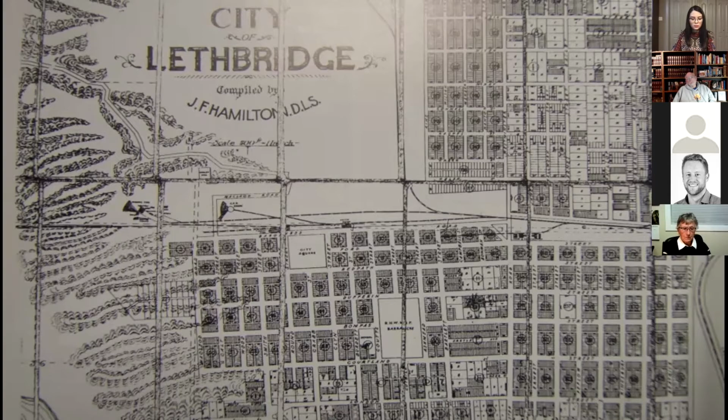A little planning background: in the 1950s, through recognition of the importance of downtown, specifically around balancing city development, the city made a pretty critical decision to expand to the west side. A lot of the consideration was that there was land to be developed, but it would also center the downtown centrally in the city.

In the 1960s, there was a general plan done by the city's planning department, which talked a lot about strengthening downtown, avoiding urban sprawl, preserving Galt Gardens, reducing and eliminating incompatible uses, and establishing a downtown merchant group, which is reflected today in the downtown BRZ.

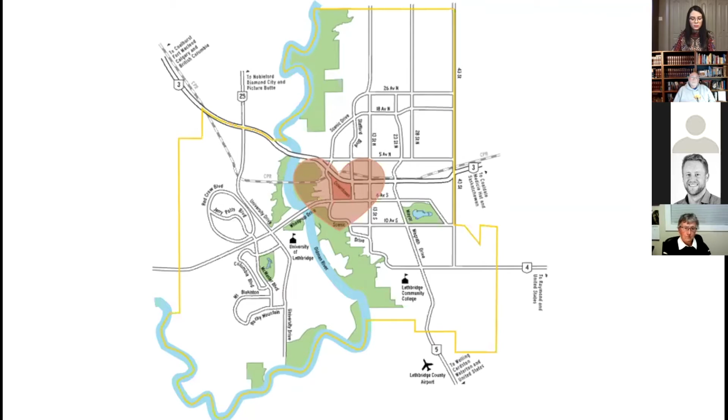Through the 1970s, a number of development schemes saw the creation of Lethbridge Center in 1975, the Provincial Building in 1976, and Lethbridge Lodge in 1978. In the 1980s, we saw the courthouse being built and the railway relocation at the center site, which saw the railway lands redeveloped into what is now Park Place Mall. In the 1990s, we saw a number of seniors housing facilities built, the AMA, the Lethbridge Police Service building, Chapters, and Toys R Us.

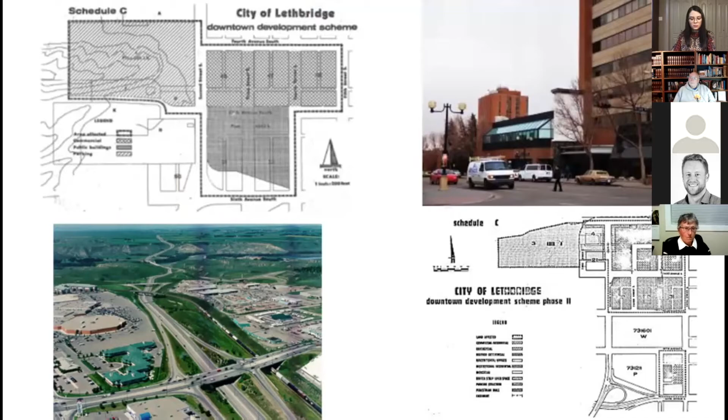Unfortunately, in the late 1990s and early 2000s, despite positive developments taking place, there were still a number of problem locations, including some derelict and deteriorating properties around downtown. Public intoxication and loitering were becoming pressing issues for downtown, and there was extra pressure to do something about it, which led to the development of some pretty strategic initiatives.

Those improvements didn't take place just by chance. In 2007, City Council established the need to look at and prioritize downtown, and by doing so, they began the project of the Heart of Our City Master Plan, which began in 2007.

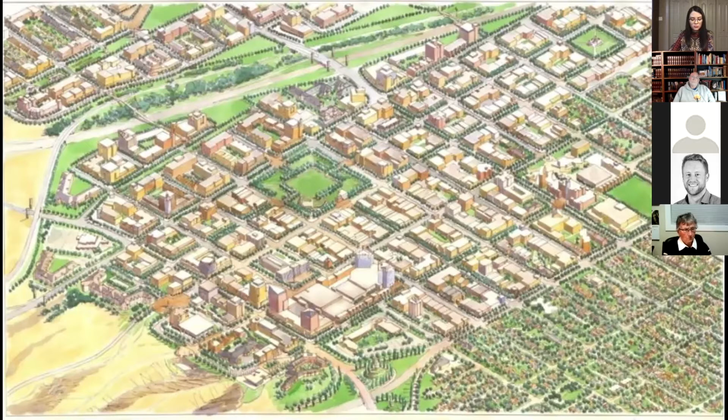By the completion of that master plan, they had established the plan itself, which gave the direction, the Heart of Our City Committee, and the position of Downtown Revitalization Manager. The purpose of those three key pieces was to generate a viable vision for the downtown that reflected the community's values, to prepare effective strategies and tools for implementation, and short, medium, and long term actions to actually enable revitalization to take place.

So the Heart of Our City Committee is the committee of City Council tasked with championing downtown revitalization. Their mandate is to be a champion, provide strategic leadership, and develop incentives, programs, and initiatives that promote vibrancy throughout the downtown. A key member of that committee is the Lethbridge Historical Society.

From 2007, the focus was really on the downtown. It put a lot of priority there because there was a lot of things that had to be achieved, and we've done a lot of work in that area over the last decade or so. In this map, from the Heart of Our City master plan, the downtown core itself is reflected by the Scenic District, Park Place District, Central District, and the Midtown District.

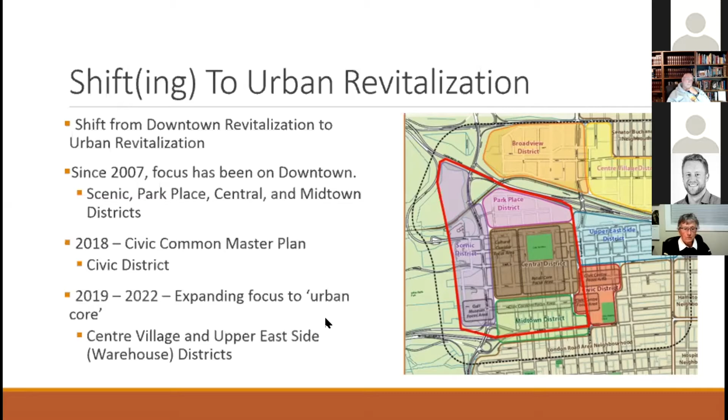In terms of urban revitalization, a lot of the work I do is grounded in five pillars: leadership and strategy, planning, design, and infrastructure, economic development, public space management and operations, and marketing communications. I'm just going to go really quickly through these.

Leadership and strategy is all about inspiring trust, inclusivity, and vision in the community, because revitalization is embedded in change, and change is very scary to the public. Even if you think you want change, when change starts to occur, there's a tendency to push back from it.

Planning, design, and infrastructure is really the emphasis for good planning and design of the built environment, which includes both the private and public realm, and context-specific built environment strategies that respond to a number of place-based identifiers in terms of responding to things like quality of life, built environment, culture, climate, community vision, etc.

We do a lot in terms of planning and working closely with our planning and development department. As George had mentioned earlier, that was where my position formerly was, and now it's in the city manager's office, but it still continues strong ties to the planning side.

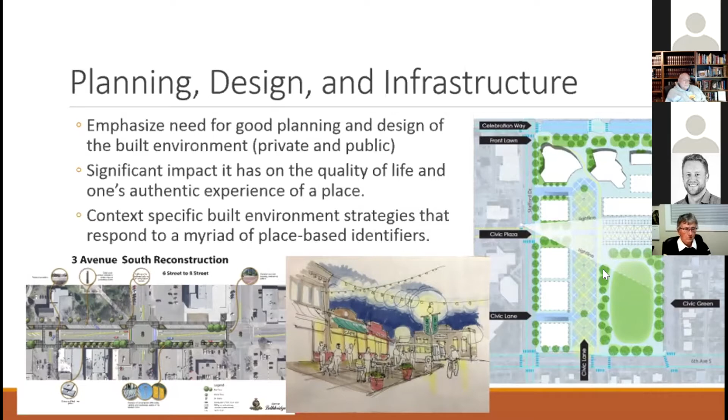From an economic development perspective, we foster a diverse and prosperous economy in the urban core through the development of programs, incentives, and initiatives, a lot of which are based around providing financial assistance or stimulus to provoke and encourage growth and development in the core and increasing that tax base.

We have a number of programs currently, through the activity grant, adaptive reuse incentive program, which will probably be something you can draw some correlations to with Elizabeth Songer's presentation in the next session, the housing incentive program, our targeted redevelopment program, and our Main Street facade and signage program, all of which you can find on the city's website under lethbridge.ca/downtown incentives. City Council will actually be looking at a few amendments to those next Monday.

So the second to last pillar is placemaking and public space management. This is all about cultivating a safe and vibrant environment, managing the public space from cleaning, beautification, wayfinding, landscaping, and of course our favorite thing, parking. The big thing here is about addressing and providing direction to the actual and perceived safety and security issues.

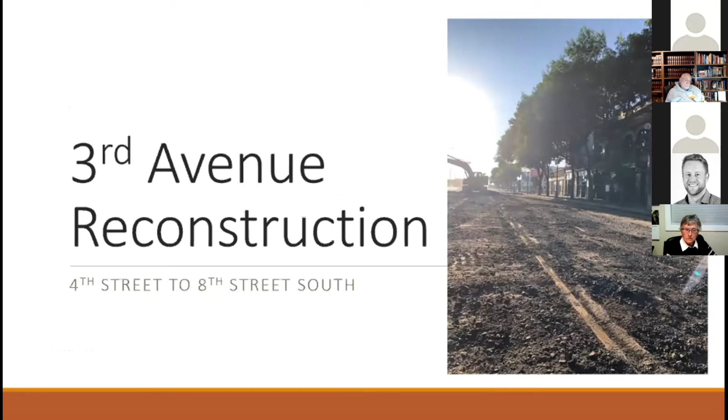So with that, I'm going to move to the second part of my presentation, which is specifically on the 3rd Avenue Reconstruction Project. Hopefully this part will tie in some of that background information around why we're doing revitalization and the processes that we go through.

Some might say 3rd Avenue South is memory lane for downtown. It's one of the city's very first streets. There are over 10 historically significant and 4 designated properties just between 4th Street and 8th Street, which is the focus of the project. It's the location of hundreds of community events, celebrations, marches, and protests, from Whoop-Up Days to street wheelers to protest marches, Remembrance Day, all sorts of things that I think Belinda would probably be best to tell you about.

It was home to the Main Street car line from 1912 to 1949, at which time, when it became too expensive, it was replaced with bus service. It was also the main highway through Lethbridge for many more years, approximately 1940 to 1980.

I've included a YouTube link here that many of you may be familiar with, to Belinda Crowson's presentation on the streetcar. If I can share these slides with the Historical Society, I encourage you to check that out.

In terms of the reconstruction project, the vision was to completely reconstruct 3rd Avenue between 4th and 8th Street to create a more vibrant street that offered a safe, lively, accessible, and attractive place to work, live, shop, learn, and play. This project was not only to provide important utility and infrastructure upgrades to the street and surrounding buildings and businesses, but also to redistribute the road right-of-way for a more balanced approach to active modes such as pedestrians and cyclists, and to enhance the aesthetics of 3rd Avenue with some of the finishings.

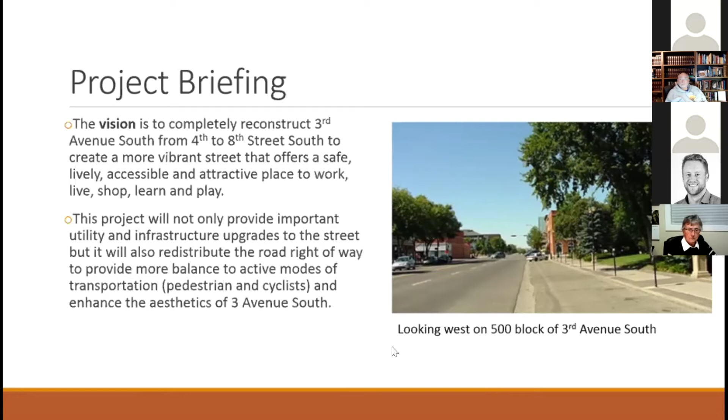So to get to where we are today, it's been about a 13-year process — getting to construction does not happen quickly. Going back to 2007, the Heart of Our City master plan really started to vision what kind of changes we'd like to see in the downtown. In 2012 was the Public Realm and Transportation Study, and in 2013, the Downtown Area Redevelopment Plan. Those are all the planning documents that provide the guidance to ensure that whatever we want to do in the downtown is done within some level of strategy and overarching plans.

In 2014, we shifted from the planning process into design, and between 2014 and 2017 was the preliminary and detailed design process. Once designs were done, including estimation of costs, it entered the CIP, the Capital Improvement Program, which is the funding source of city infrastructure. Now we are sitting in phase 1 of construction, and we'll be proceeding to phase 2 of construction next year.

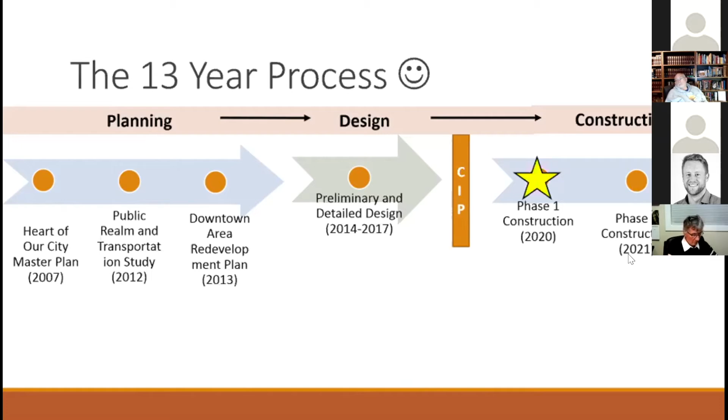So I'll just break that down with a little bit more detail. From a planning perspective, the Heart of Our City master plan provided some key points like transportation options that are safe, integrated, and that prioritize walking and cycling, recognizing that streets are key components of the urban experience and must be planned with this in mind.

The Public Realm and Transportation Study identified that we need to change our mindset and provide a more balanced approach in terms of reducing vehicular traffic and reallocating space to the public realm, and included conceptual designs for 3 priority corridors, which included 3rd Avenue South.

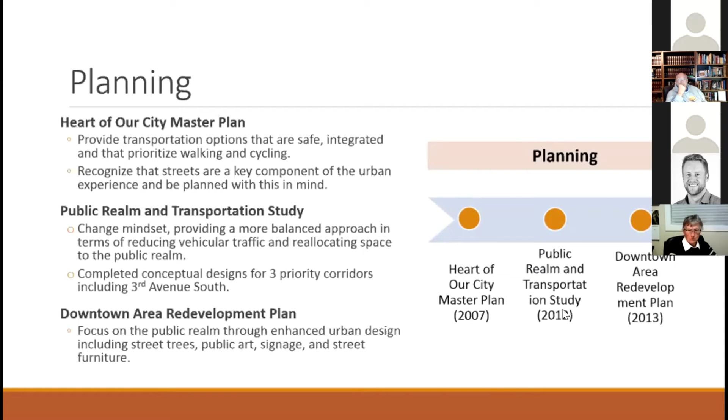The Downtown Area Redevelopment Plan discussed focusing on the public realm through the enhancement of urban design, including street trees, public art, signage, and street furniture. So all of these 3 documents really provided the groundwork that led into the design stages.

Some of the design considerations were that 3rd Avenue South has a dynamic mix of historic and contemporary architectural styles, and that should provide the framework for a vibrant streetscape treatment. Creation of a pedestrian promenade with high level of street pageantry in front of major civic spaces and buildings such as the SAG and CASA.

Provide three travel lanes as opposed to 4, which would allow for angled parking and enhanced sidewalk width along the north side, which interfaces with Galt Gardens, SAG, and CASA. Alternative concepts would provide parallel parking configurations between 7th Street and 5th Street, to allow the maintaining of the existing street trees and wider sidewalks, both very important from a public realm perspective.

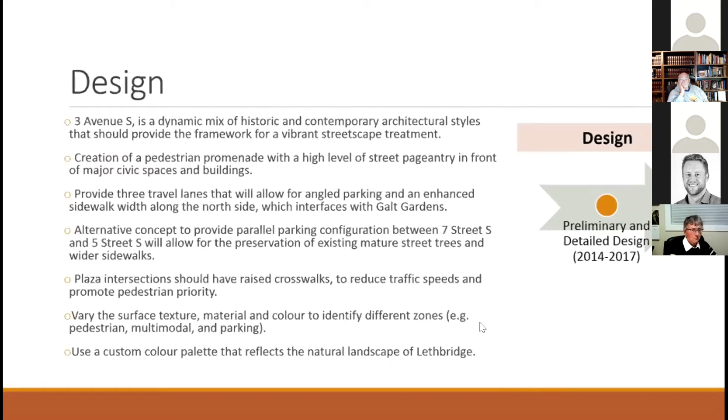Discuss plaza intersections, which will be part of the feature in front of the SAG at 6th Street and 3rd Avenue, as well as raised crosswalks, which would reduce traffic speeds and promote pedestrian priority, all things that have been considered. Varying the street surface texture, material, and color in different zones to identify what is pedestrian and what is not, and using custom color palettes that reflect the natural landscape of Lethbridge.

I'm just going to share a couple of the images from the planning documents over that 13-year span. This is an image, a conceptual design from the Public Realm and Transportation Study, identifying a section of 3rd Avenue.

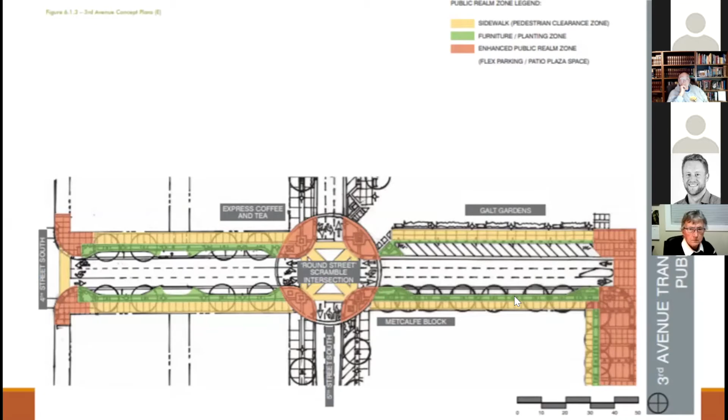Here's one with a little bit more detail, including the 6th Street raised intersection in front of the SAG.

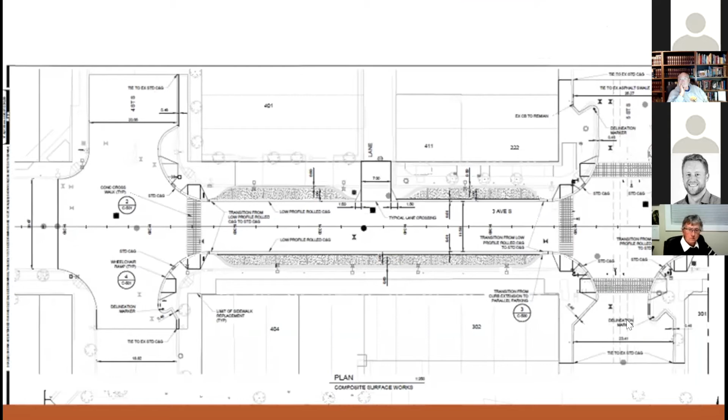We then progress into more detailed planning, which includes all of the engineering to identify things like drainage, electrical conduits, where the landscaping will go, grades, and all the finer details. And our final deliverable is a rendering showing how that public realm is going to look.

This will be Lethbridge's first streetscaped, reconstructed street that incorporates that concept of streetscaping, which would bring together all of the elements that give a street character and make it functional for all uses, as opposed to prioritizing one use. In this case, we're specifically focusing on the pedestrian improvements.

So once design was done, we moved into funding. The Capital Improvement Program, or CIP, is the plan that identifies required capital projects and provides a planning schedule and financial plan to achieving those.

Funding for the design was completed in the 2014 CIP, and the funding for construction was approved in the 2017 CIP. Construction was funded for just under $11 million, with $7 million of that coming through the federal gas tax as opposed to provincial or municipal taxpayers.

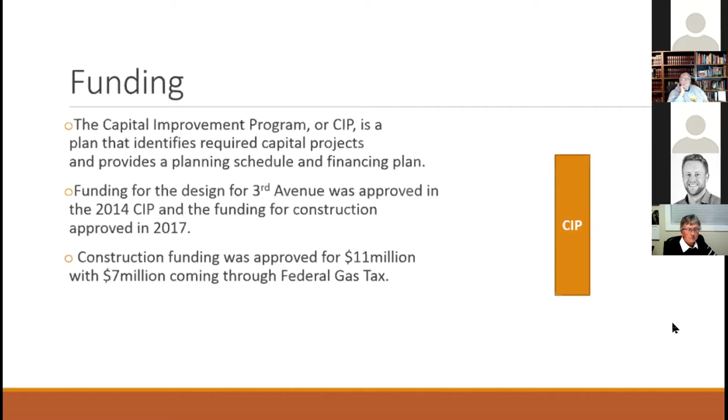As we moved into construction, one of the first things that we did was we hired a contractor for project management and construction, which in the case of this project is Stantec Engineering. And the phases of construction really include 4 basic steps: demolition and removal, utility and servicing replacement, street and sidewalk replacement, and finishing touches.

So if you can imagine, you dig your hole as deep as you can, and then you work your way up, and I'll go into each of those stages in more detail.

The construction stage has a lot to do with business impact mitigation. Obviously, with 3rd Avenue South being a major corridor, there are many businesses, nonprofits and facilities that front onto the street that are being impacted.

Through public engagement, strategic phasing, collaboration with the downtown BRZ, and a 3rd Avenue project office, where myself and the project manager on the transportation side are doing our best to mitigate business impacts. Of course, we can't mitigate everything, but we feel quite confident that we've been able to do a pretty good job so far.

We did structural assessments on all the adjacent buildings. As noted earlier, this is a corridor that has a lot of very important historical buildings, both those that are just deemed significant, but also those that are designated.

So when you're bringing in that kind of heavy machinery, we had an engineer go into every basement and go on every roof of the buildings along the 3rd Avenue corridor and did an assessment of their current condition. Through that process, prior to construction, we identified what we could bring in and what we couldn't in terms of heavy machinery.

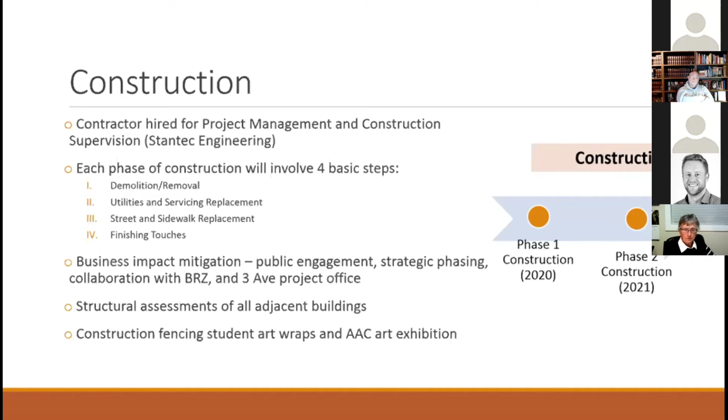I'll take you through visually with some pictures the process. The first basic step is the demolition and removal. In this image, you can see the asphalt milling, the scraping of the asphalt surface off, and this is the process that exposed the streetcar lines underneath. We did some testing to figure out the depth, and the depth of the milling was set accordingly. A couple of things that we found.

The photo on the left is a bricked manhole, the equivalent of a new sewer manhole. Obviously, this was put in place in the late 1800s, early 1900s. The pile of rubble on the right-hand side is one of the old planters that stood on the north side of 3rd Avenue and 6th Street, just out front of Festival Square and the Gate Church.

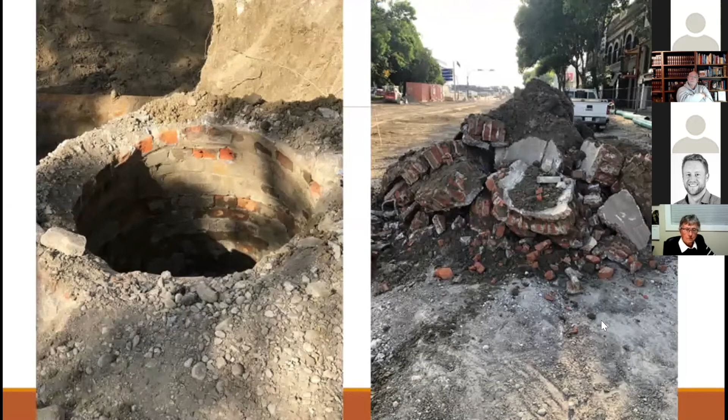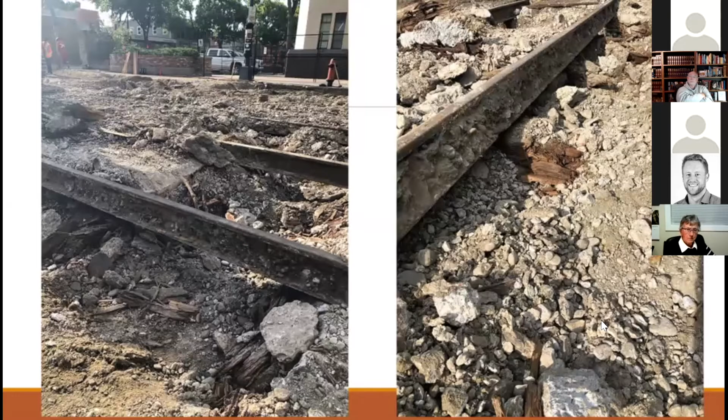The famous rail lines were exposed and then removed, and in the picture on the right you can see the wooden rail ties being exposed. In this picture you can see a pile of those wooden rail ties, again just showing the age of the infrastructure that was being removed.

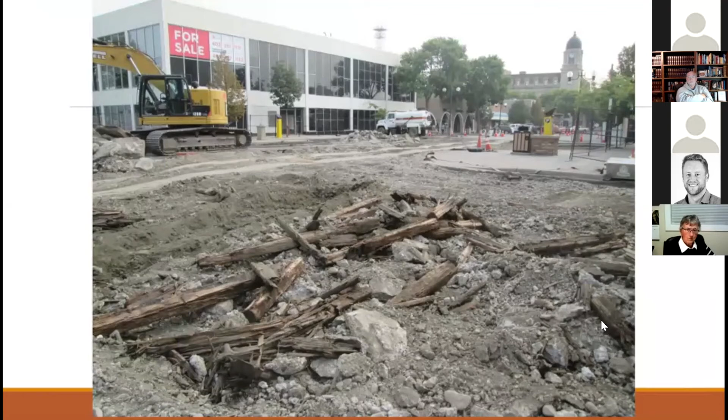Step 2 is the utilities and servicing. Once we've done the demolition and removal of everything that needs to be removed, we start putting in new infrastructure. Here's a side-by-side of that brick manhole that was removed and a new modern concrete manhole that you can see on the right.

Also, with the men down there, it gives you a context of how deep those trenches are dug.

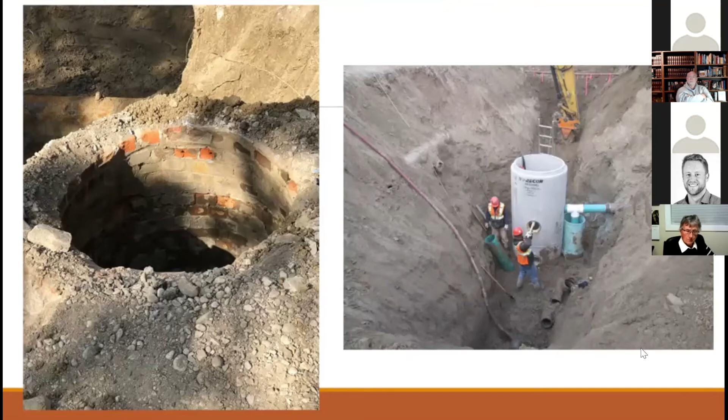In terms of the infrastructure improvement and modernization, basically the whole corridor had no shut-off valves. So if any one business on 3rd Avenue between 4th and 8th Street was dealing with an issue, they would have had to turn off the water for the entire corridor to deal with it. Here's an example of a valve that allows for more planned and strategic shutoff, so it only impacts one block at a time.

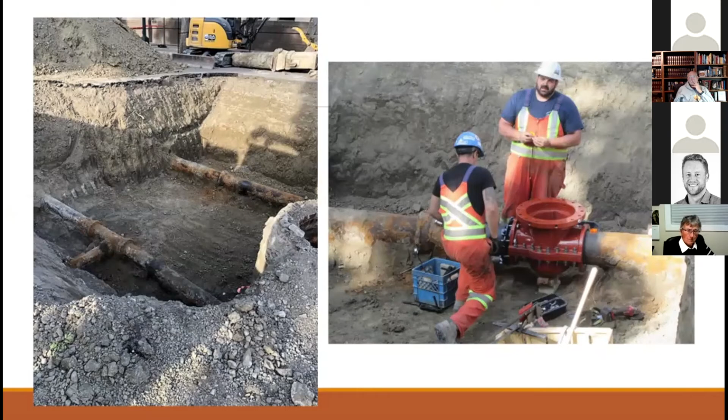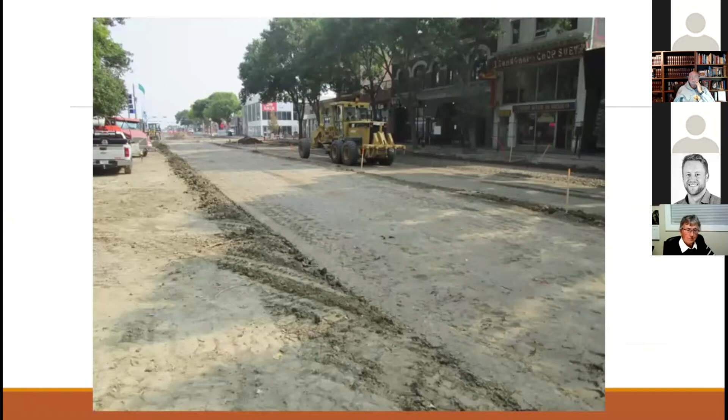Now once we talk about the utilities and all the things that get buried, there are the things that are visible, the street and sidewalk. Unfortunately I don't have a ton of images here because we're just at this stage, but earlier this fall we were doing the grading work to establish the new base layer, and just before this most recent snow, we started doing the curb work and the new parking spaces.

Stage 4 is the finishing touches, which we haven't got to that stage yet on the project.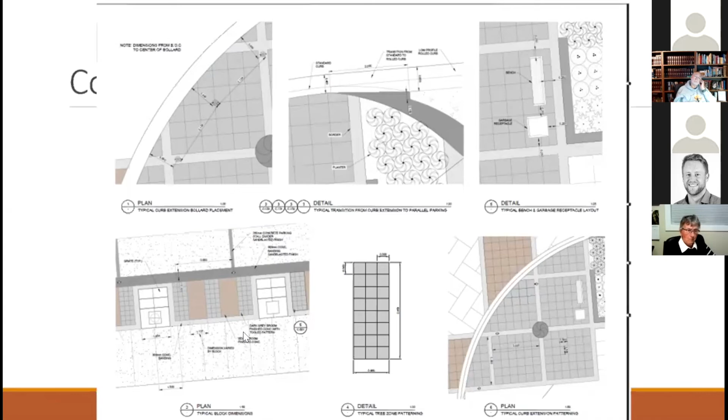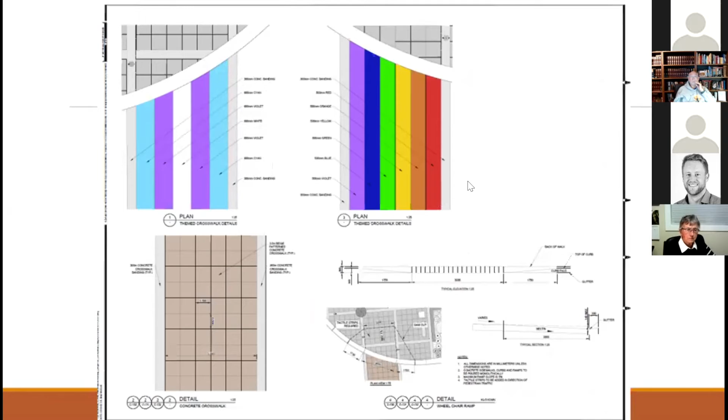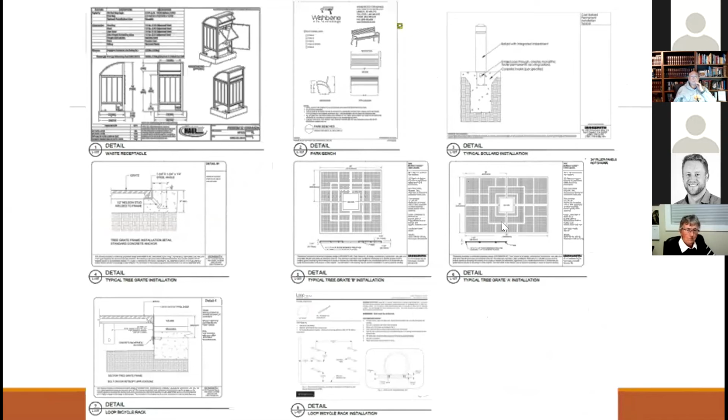I'll share some images from the plans. We're talking about new stamped concrete with distinctive colors, new permanent colored crosswalks reflecting the transgender and LGBTQ+ flag colors, and new infrastructure including garbage cans, benches, bollards, tree grates, and bike racks. Everything will be done to a new modern standard, nice, crisp, and tying everything together.

In terms of what's next, there are a few things that will build off of this first project. In Festival Square, the parking or event area where the farmers market is often held on the northern end of 6th Street, we have a project to take out those 14 parking stalls and transform it into a year-round plaza that can host various events. This is especially prudent right now given the pressures of COVID-19 on outdoor spaces.

The conceptual design work for this project was done in spring of 2020, and we've got council's approval to try and leverage municipal stimulus funding from the province of approximately $1 million. If approved by the province, we're looking to have construction begin in spring of 2021, building right into the 3rd Avenue project there.

The 3rd Avenue beautification project, running between 8th Street and Mayor McGrath Drive, is a continuation of the streetscape level improvement—this doesn't include underground infrastructure, just streetscape improvements. A functional planning study is currently being completed, and construction will probably be planned in CIP for 2025. No funding is approved yet, but we'll put it forward in that 2025 CIP.

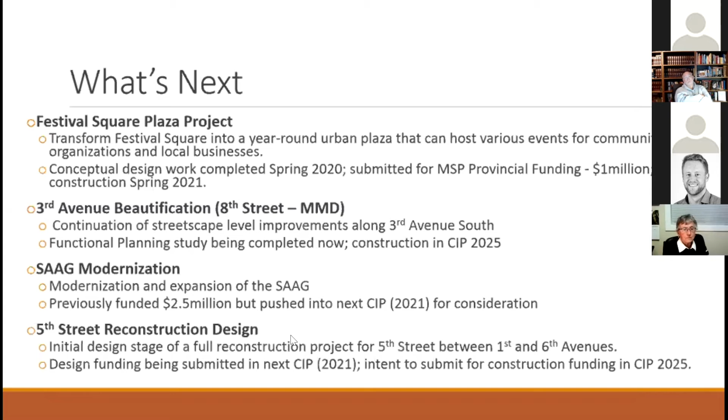So with that, I am wrapped up and would be more than willing to entertain any questions.